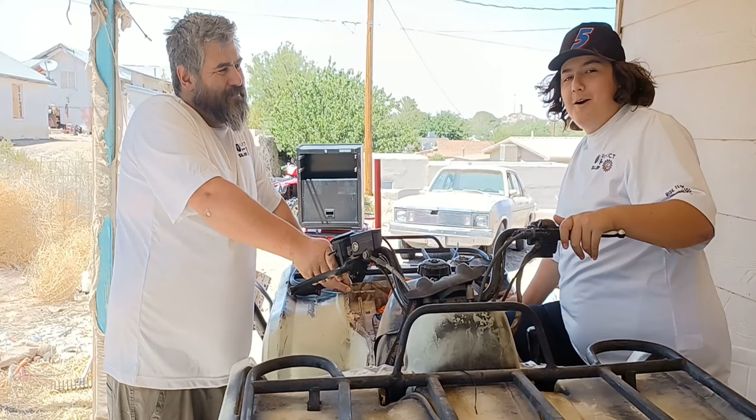Welcome to Project Sullivan. On this week's episode, we're going to pull the carburetor out of our Hisun ATV. Then we're going to rebuild it. Then we'll have that carburetor back in this ATV. I had some concerns to voice.

Gogo already had a new brake master cylinder installed, so we bled the brakes on our Hisun ATV. We had our lovely assistant, Nikki, help us pump the brakes so I could show Gogo how to bleed brakes. With an old piece of brake line and a water bottle, we made a brake fluid container. It worked very well, I think. Now that both front and back brakes are bled, this disc brake system can finally stop.

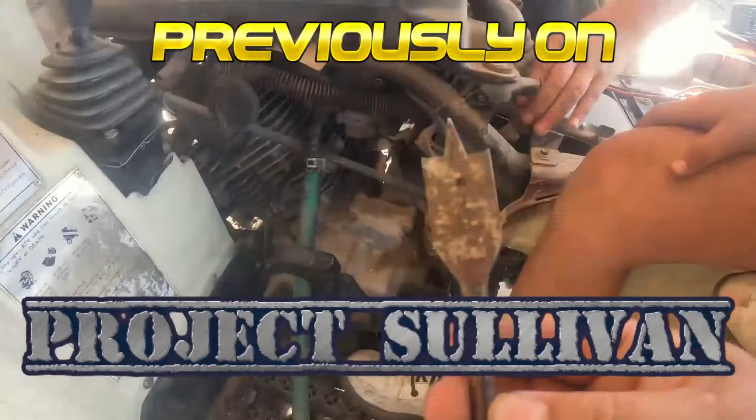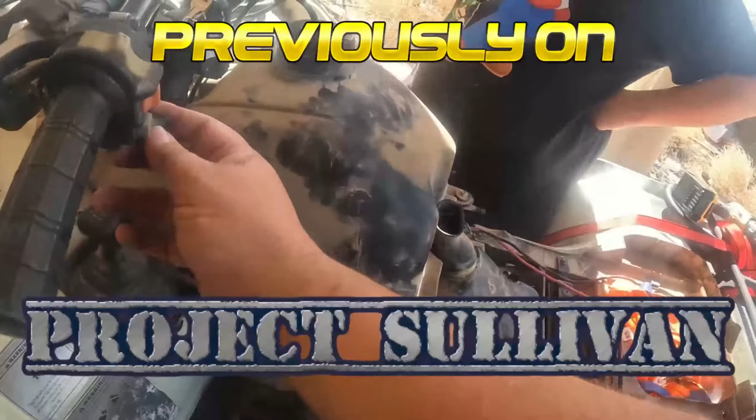Showed Nikki how to check the oil. We removed the upper panel to expose the fuel cell to get a better look under the hood, so to speak. We drained the old fuel in preparation to get it ready to run. We checked our air cleaner after putting some new fuel and starting it up with a little help from one and done. We've discovered we're going to need to do more to this ATV. That's why this week we're rebuilding the carburetor.

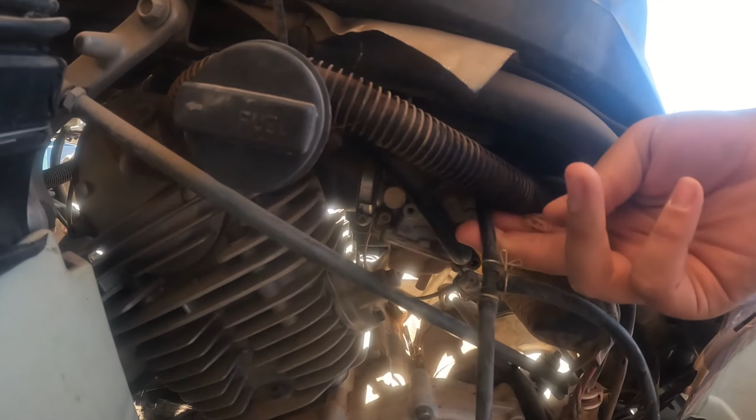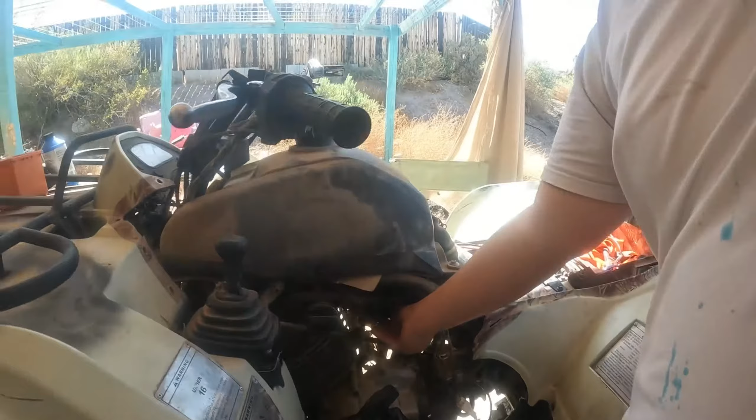So, where's the carburetor, Gogo? It's right there. Well, this hose is connected to the carburetor. Yeah, you can pull that one. That one just pulls off. Oh, that was easy. I don't know what that hose is. How about this hose? You should just disconnect it, yeah. Wait, isn't this one gas? Yes. But the valve's off, so it should be able to take off. Oh.

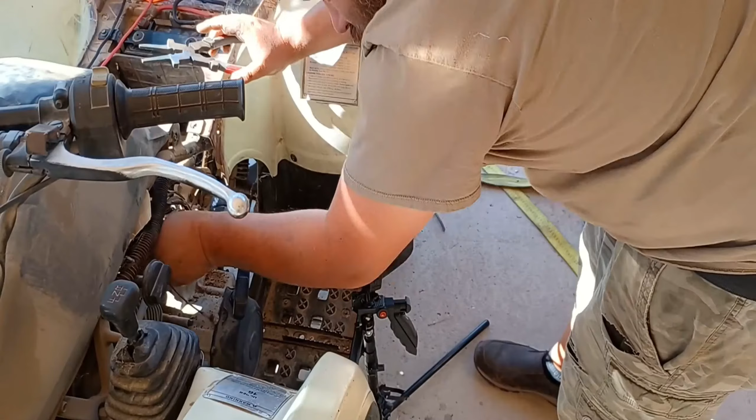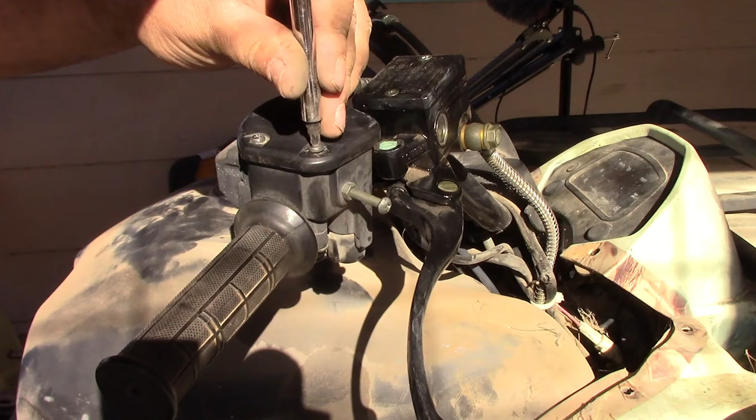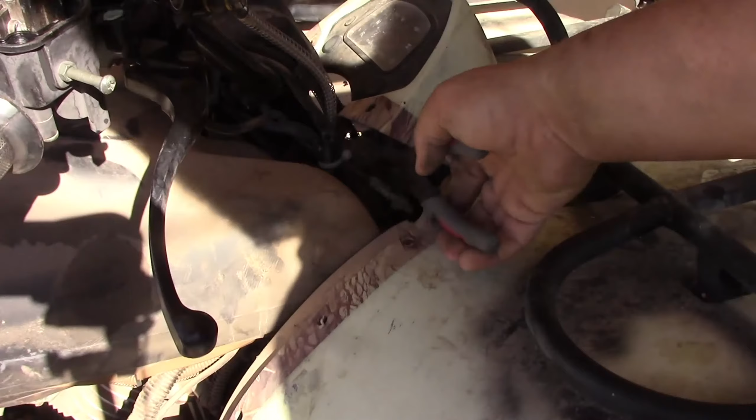This right here we clip. It's got that quick removal deluxe option. You know, plastic's already dry rotted and breaking. So, give this a little twisteroo, twisteroni, the San Francisco treat. And then cloud. Get that thrown around there. Now the carburetor's out, and there's the throttle cable. Success! Now we have to rebuild this one. Now it's time to go inside. We'll meet you guys inside.

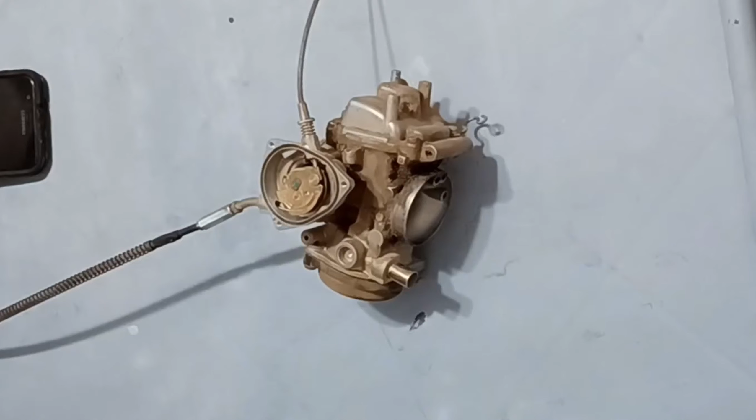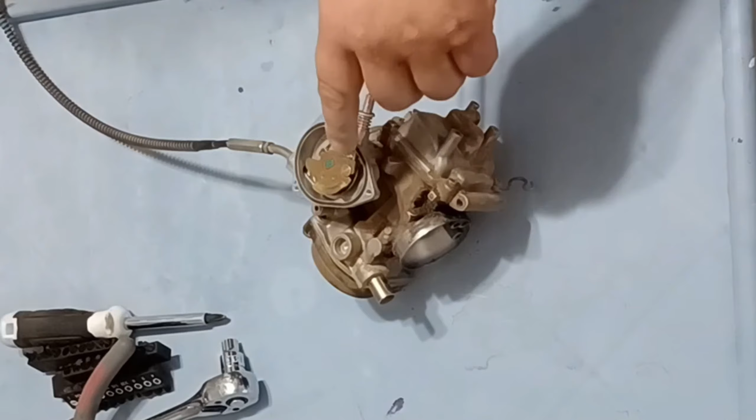So this is our throttle cable. Now how do we disconnect that? This is our remote idle. Is that our issue? See, you go like this and you spin it and it spins the idle screw. If you pull this cable, it either pushes this out to give it more idle, like more gas at idle, or it pushes it in to where it'll be less fuel at idle. Is that our issue? No, because it used to idle. So we need to clean it out first.

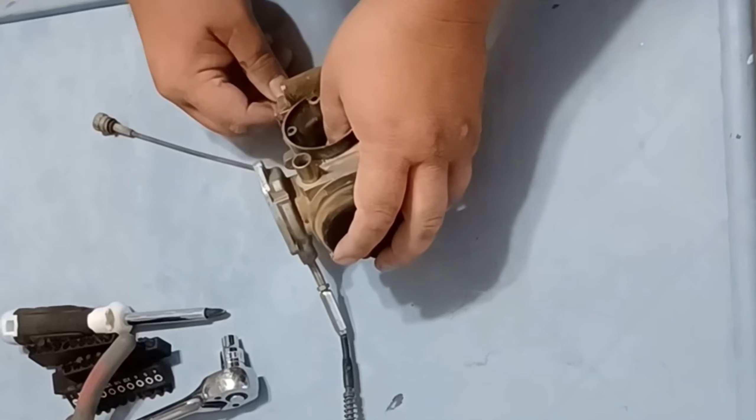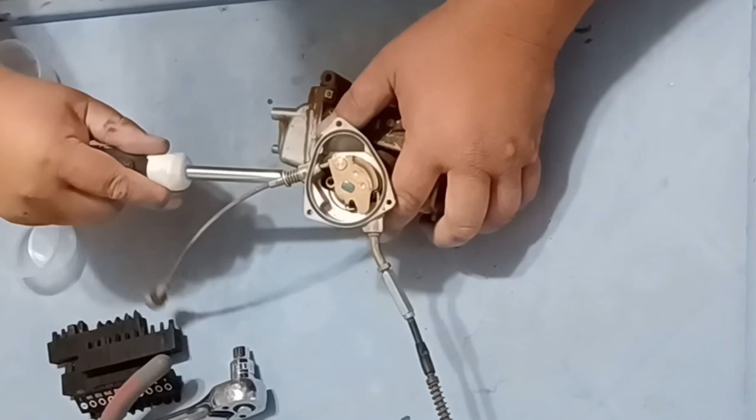This is our bowl. This is probably where our problems are going to be. So that's what we need to take off first. Let's get a dish for all the... Alright. It's nice to actually be under the AC for this. Oh yeah. Break that loose. So far so good. Alright, let's take some extra video here. Of course, I'm the hardest one. There you go. We'll go ahead and take that off.

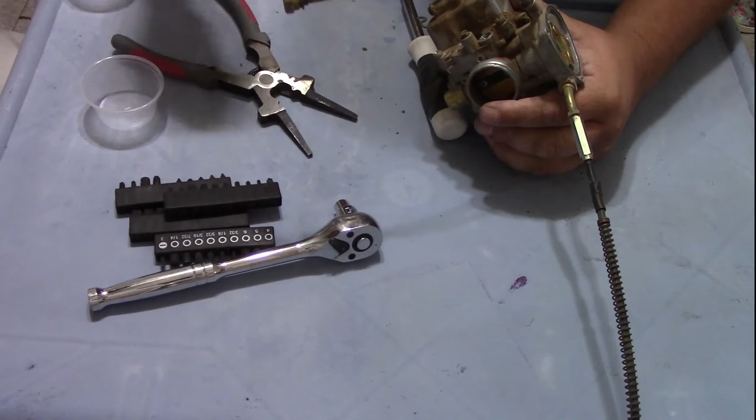Mostly we're working on our carport for this sort of thing. It is really nice to be underneath the AC for once. Right. I don't know if it's too loud. We might have to do voiceovers here to compensate for it. Hopefully not.

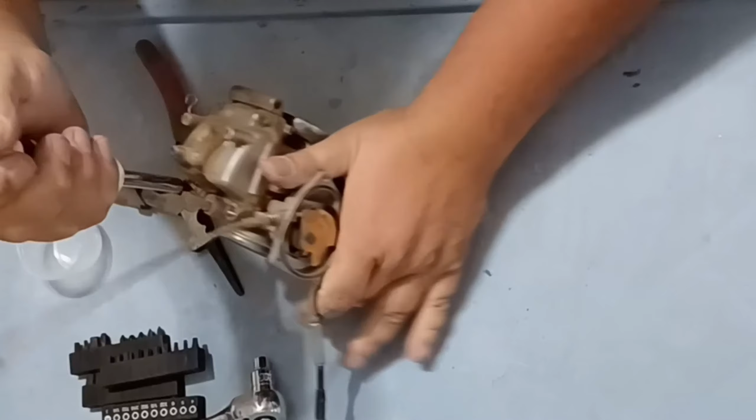Okay, hold the carburetor, go two hands. I'll do my best. See if I can teamwork it. That might hold us back. Go and take this screw off. Drill? Well, when we take the other screws off, maybe it'll loosen up. This is my first time personally taking apart a carburetor.

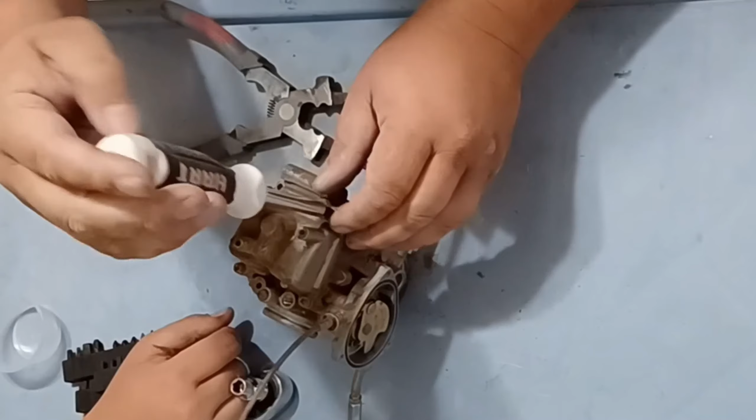I'm not a carburetor guy. I've only taken a couple of these little carburetors apart. How many car carburetors have you taken apart? Oh, quite a few. I've owned a lot of crappy cars. So do I now. I own one crappy car. That's not very crap, okay?

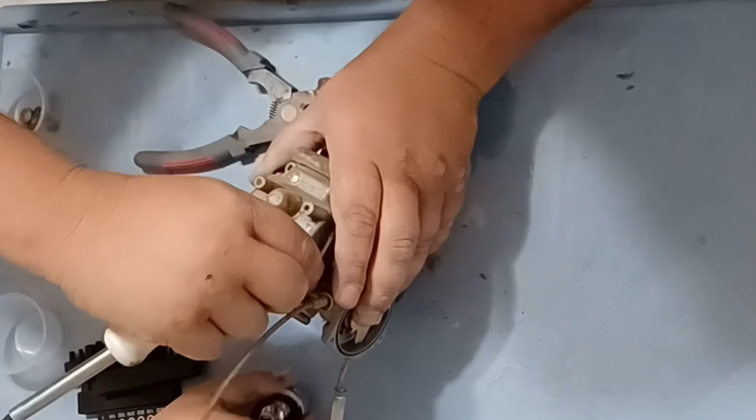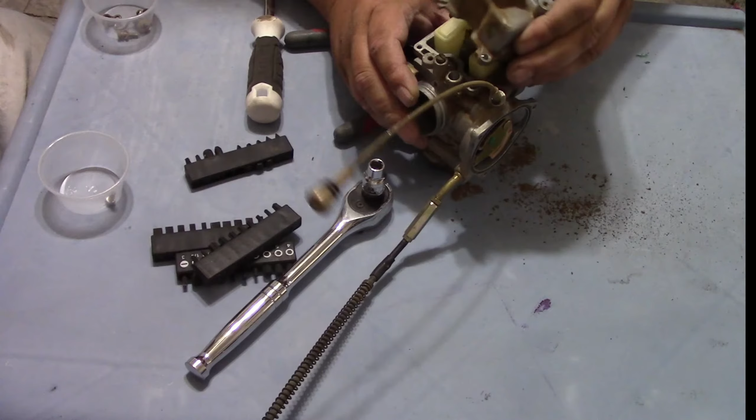Do you need a bigger one? To replace that screw? Oh, look at all that gunk that just shot out. Yeah, we don't want to put that screw back in. We probably won't. Put this in our discard pile. Okay, so here's our bowl. This is our gasket. We don't want to tear that because I plan on reusing it. We don't have a rebuild kit, which is crap, so we'll see how that works.

This is our float. This is what turns on and off the fuel. So the fuel comes in here, right? And then when this float is up, it shuts off the gas. These float on the gas, so when they come down like this, it puts more gas in. But if we look inside here, that is amazingly clean. It should not be that clean. Do you think it would be the... I don't even know what I'm trying to say anymore. Well, you better get used to doing carburetors. We have like three more that we have to do.

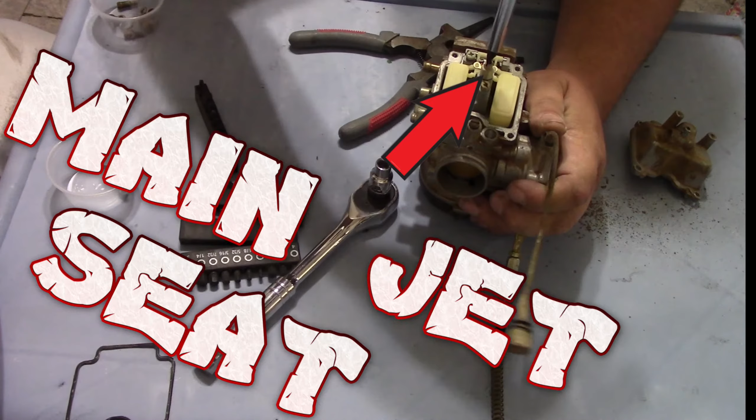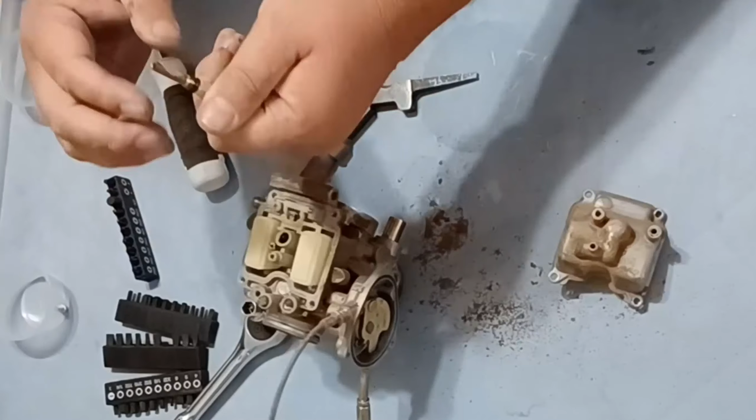So that's gonna go in there. Take a good look. You have to rewatch this video to figure out where the stuff goes. That's why we're recording from a couple angles. These are our jets, our metering jets. Well, that is so weird that it's that clean inside. I'm gonna try taking this jet out. I think that's our jet. Okay, it was only tightened to, which is not very much, so that's good. It wasn't like the other one. Nice and clean inside. Why is this carburetor not working? The needle's making noise.

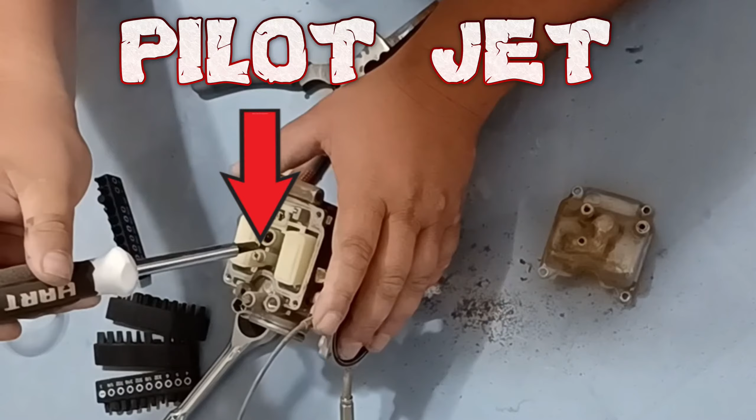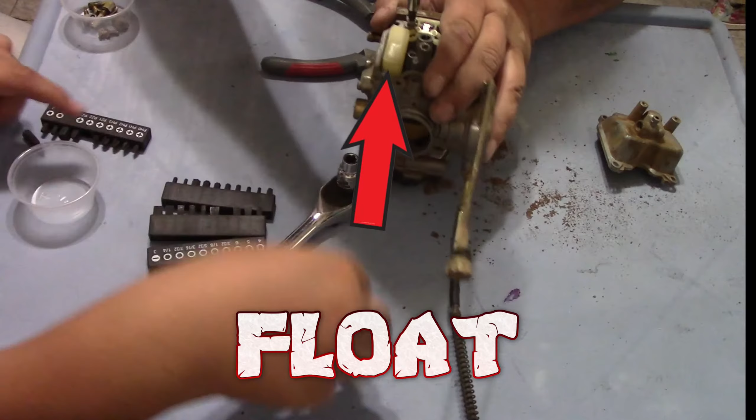Let's take this bad boy out. Okay, that's the one I took out of there. Here, instead of that, having a discard pile, there's that there. Again, reasonably tight. Let's take off our... Maybe we'll just do a half rebuild and not take out every little piece. Either way, we're going to soak it in vinegar overnight.

It might have been that hose. Remember that bad hose that we found was broken? Oh, yeah. The one with the air cleaner. Are we gonna rob it off the Nova? Because this is looking surprisingly clean.

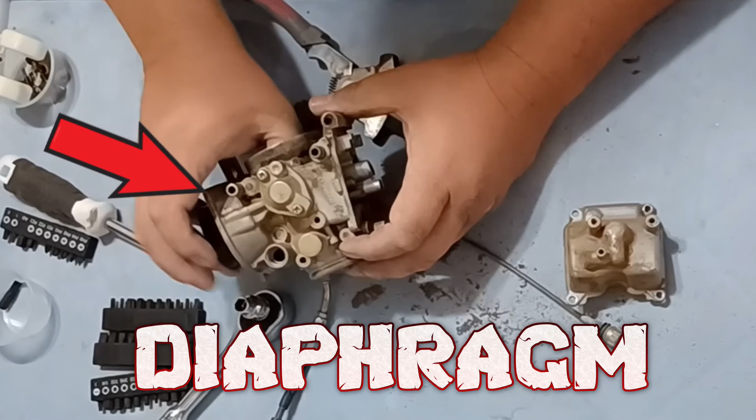Here's a Phillips head. Let me see. Oh, never mind. And that was spring loaded. That could have ended bad. I've had my experiences with springs for the day. I got it with that one. Maybe not. I need it. Okay, that's the... Okay, that's for the needle. Got it. That still doesn't look that bad. I've seen worse in videos.

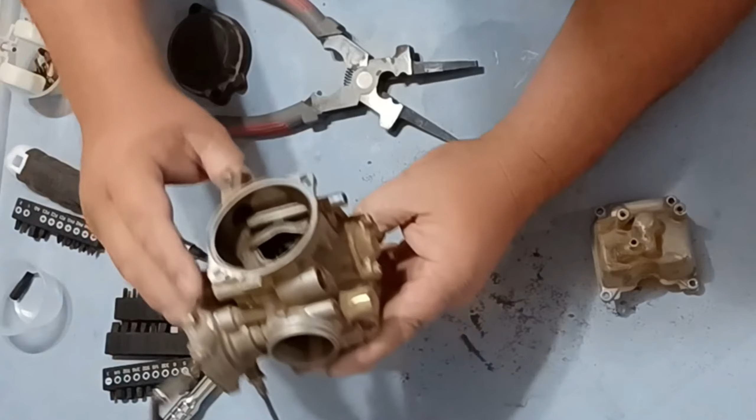I don't know, that needle actually looks like it's pretty dirty. Oh. That might have been what was dirty. And then like all this is pretty nasty in there, you can see. So, let's get this. Get the brake cleaner out. No, let's get this soaking in vinegar. Why are you so insistent on using vinegar? Vinegar.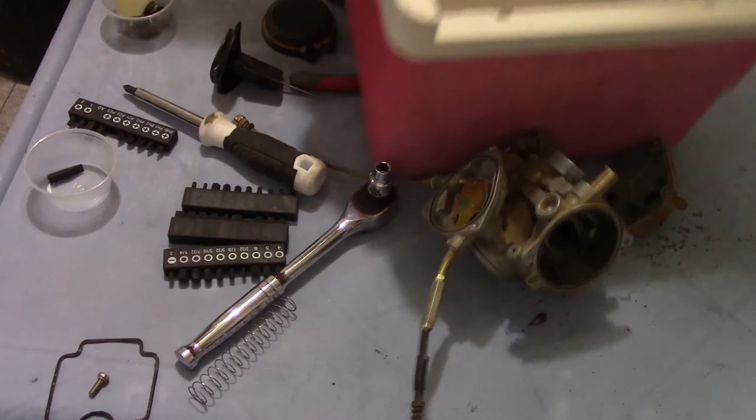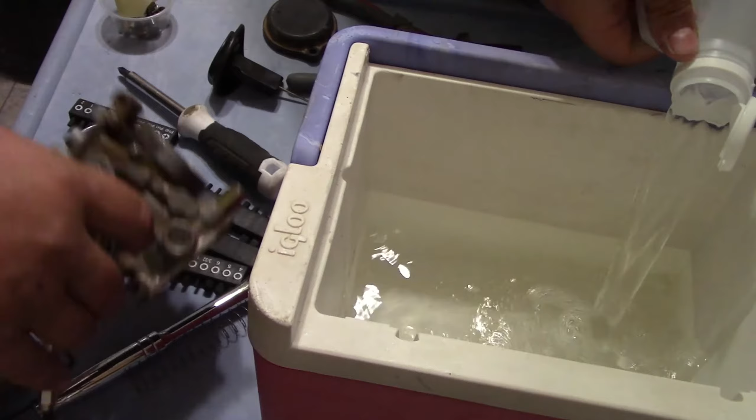Hey, guess what? It floats! Are you ready to get up? Dave, did you know how it floats? Well, I hope so. There's a float in it.

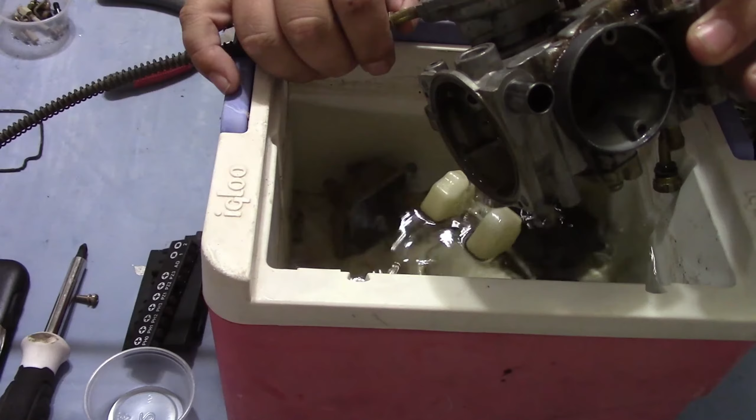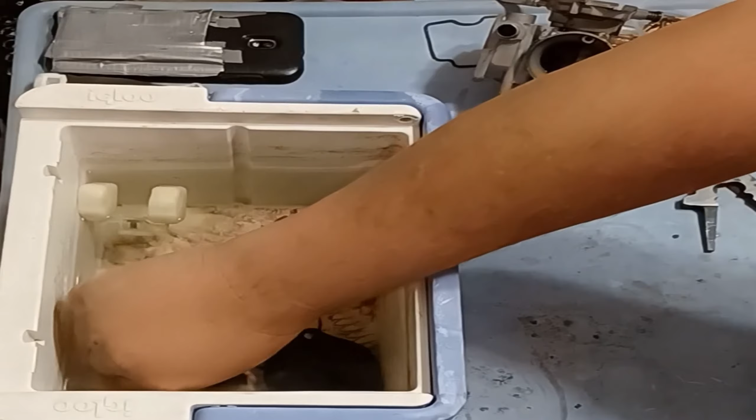Day 2. Drain it, best we can. Swear to God, if it still isn't idle, I'm just gonna be upset. Well, we'll see. We might need to adjust some things. I did notice that the needle was kind of stuck yesterday when I was taking it apart. And I thought that plate was gold yesterday. Might have been. Flashback to that right now. Now our whole house smells like vinegar.

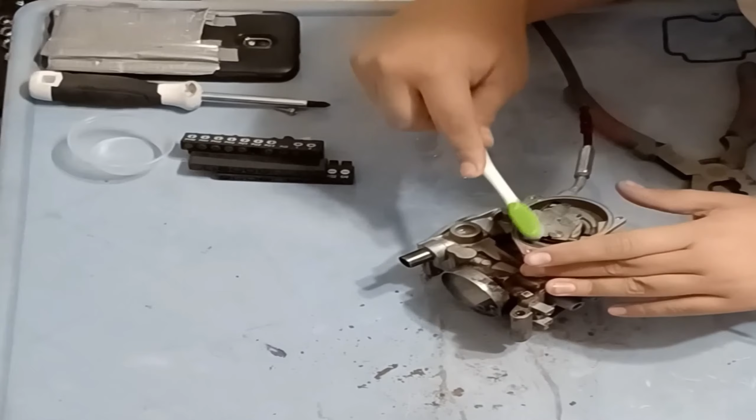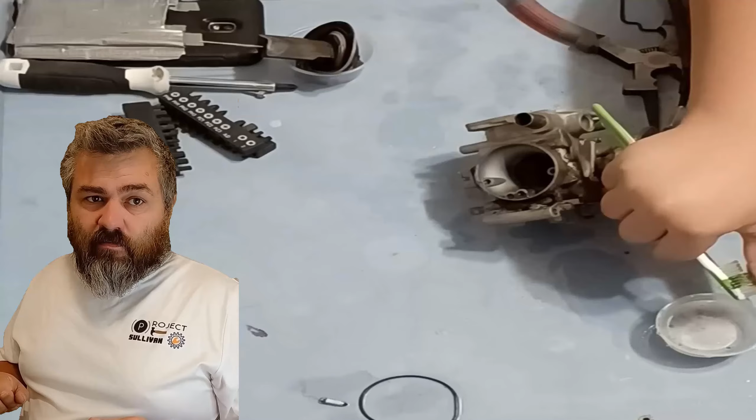Most motorcycles, ATVs, and UTVs sold today are fuel injected, which I prefer. It's like I always say, small engine, carbureted, broke down, probably the carburetor. Normally I try to avoid buying anything small engine wise that's carbureted. ATV, UTV, motorcycle, but here's the thing, I already own one, and there's plenty of them out on the road. Even if you're buying them to restore them or repair them and flip them,

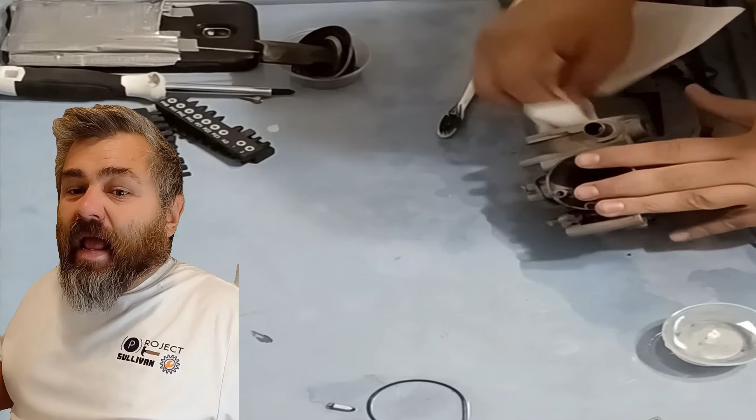you can. Since we're rebuilding one, here's Project Sullivan's Know Nothing Guide to CV carburetors. Some things about carburetors are present and have to be present in every single version of a carburetor. Before we get started, I want everyone to know I'm not a carburetor guy. I just know enough to fake it. And I can kind of teach you how to fake it. Let's see how it goes.

The concept behind carbs is simple. See, that could be cool. Let's say carbs.

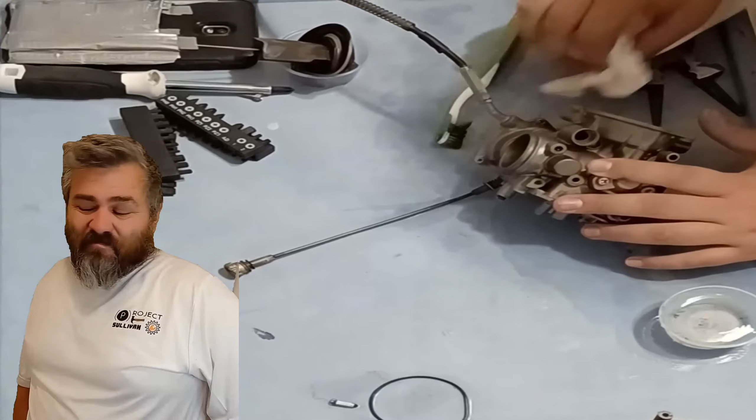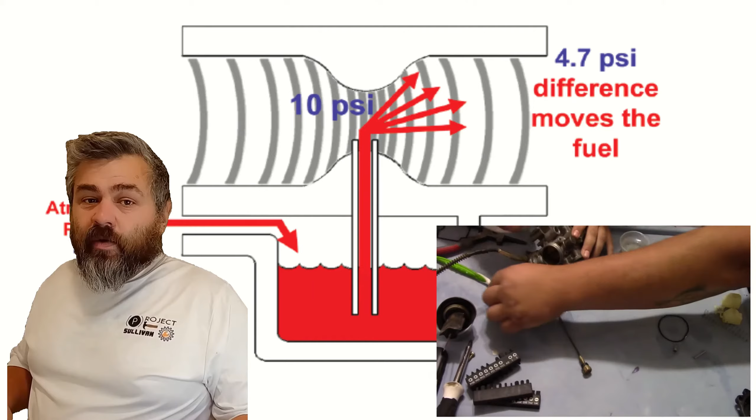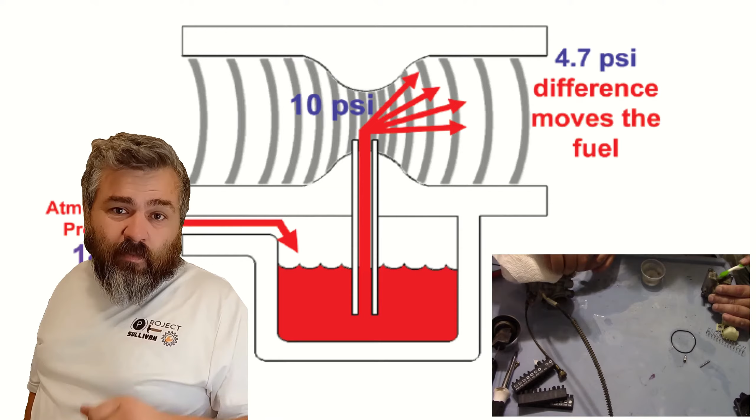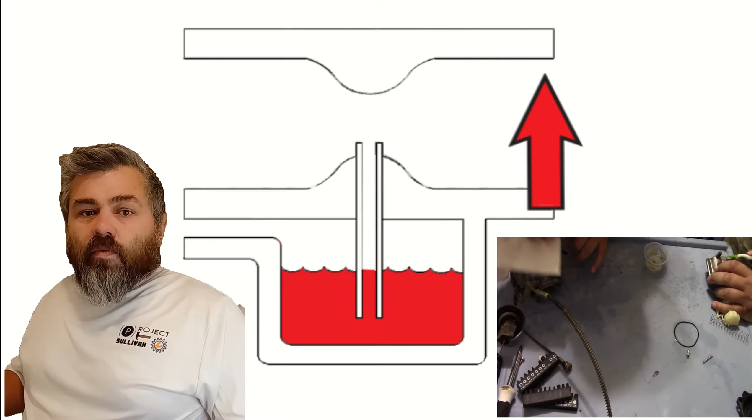Like I said, carburetors, the concept of carburetors is simple. All they're really doing is creating an atmosphere where you can make an air-fuel mixture that an engine can run off, trying to get as close to 14.7 to 1 as possible to be most efficient. First thing you need to know about a carb is the Venturi. And the Venturi has to be present on the carburetor for it to even work. The carburetor we're building today only has one Venturi.

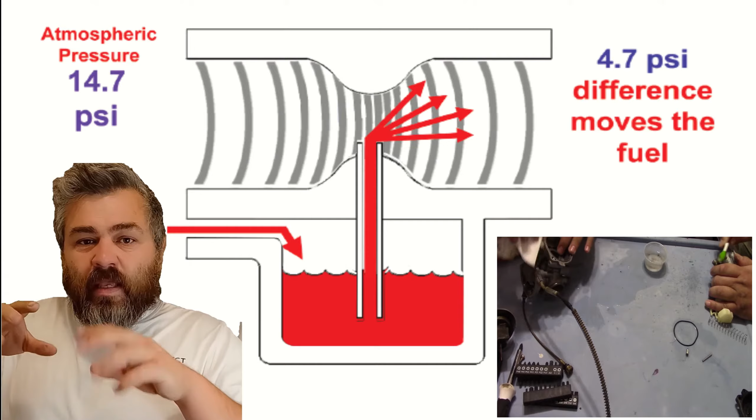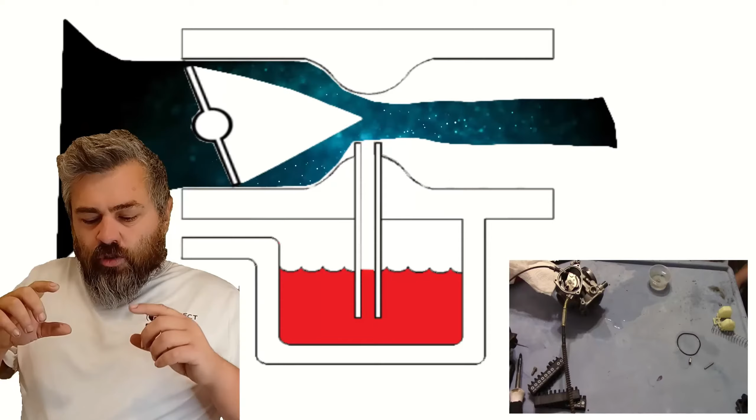The textbook definition would say the air's speed increases while the pressure decreases. This drop in air pressure pulls that fuel out of the jets, which goes into the Venturi, mixes with the air, and goes into the cylinder head. All this basically means is that when you hit the throttle on the handlebars, it pulls the throttle cable, and the throttle cable just opens the butterfly, as seen in the picture here, and it's actually the vacuum that controls how much the slide is moving in and out. On a mechanical one, it's all controlled mechanically instead of through vacuum.

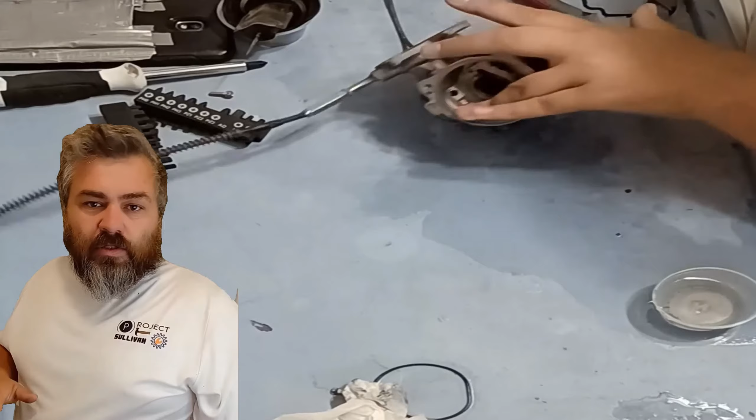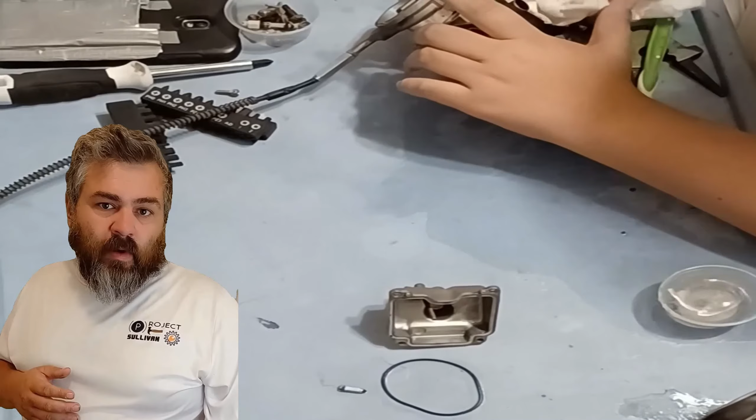CV carbs have their application. They're better in multiple altitudes. They have a smoother throttle response. The mechanical ones always have to be adjusted according to altitude, but they're your performance ones. They're your racing carburetors. They're all or nothing. They're just ready to go.

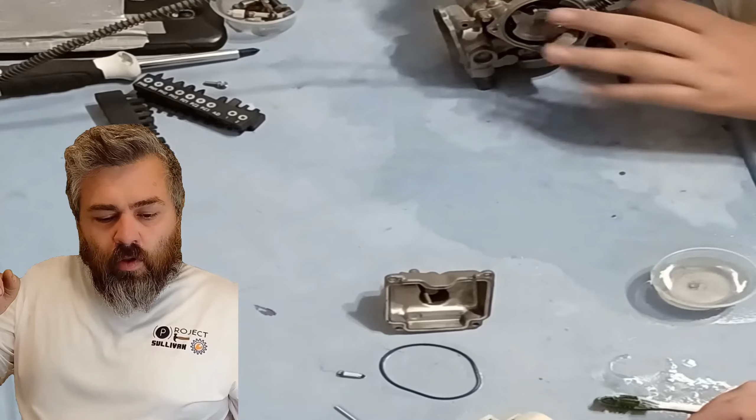The first piece of the carb I have already covered, which was the fuel bowl, and I talked about how the fuel gets into the plunger and the float. But the second part I want to talk about is the accelerator pump. The accelerator pump on this carb activates by vacuum as well. And basically what it does is when you hit that throttle, the vacuum sends a signal to the carburetor and there's a burst of fuel that gets thrown into the venturi,

and it gives you that get up and go. You know what I mean? A little bit of get up and go. So you hit the throttle, whum, whum, whum. It gives them a little extra fuel, which when it's wide open, you can hit that thing and it does. Accelerator pumps kind of all work the same.

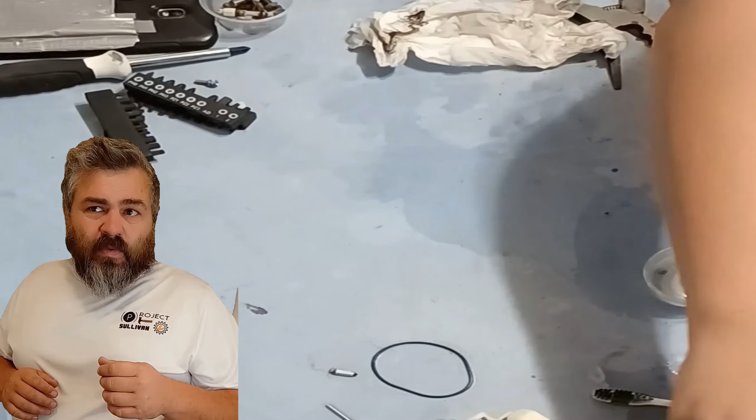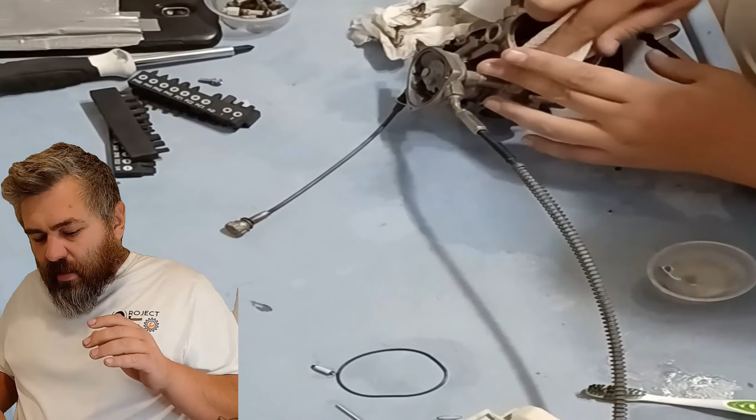That's just, ours is operated by vacuum. That's all you need to know. We're also not going to take this one out of its housing because we didn't have an indicator that it's broken. Your idle air fuel mixture is 14.7 to 1. That's what you're ideally looking for when you're adjusting a carb. Fuel injection just keeps it there constantly, or relatively constantly.

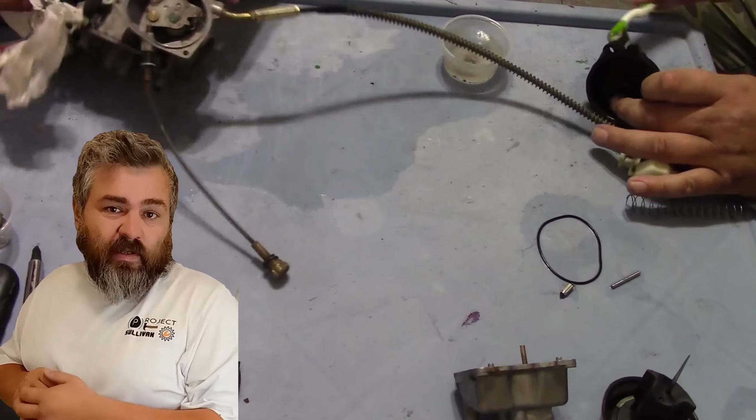And that's why fuel injection gives you more horsepower and better fuel mileage. But it also means more working parts that, when they need to be fixed, are more expensive and oftentimes harder to fix. To try and keep the air fuel mixture at around that 14.7 to 1, the carburetor uses 3 circuits. First off, we're going to talk about the main circuit.

Alright, the main circuit is your fun circuit. That's what happens when you're at 75% throttle to open throttle all the way. That's your fun zone. Your get up and go, your climb anything, your pull anything. A lot of times this one doesn't have a lot of problems, but if you are having problems at upper ranges, that's where we would look. But as far as we know, we don't have a problem with that. Right now, we have a problem with a different circuit.

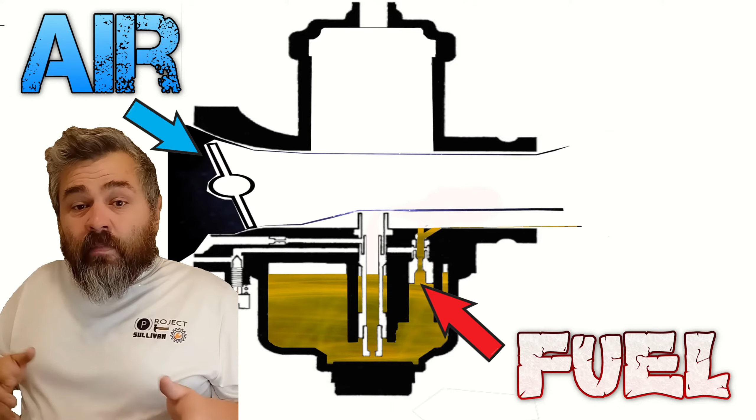The second circuit you're going to deal with is the medium circuit. The medium circuit takes care of everything from like 5% throttle to 75% open. If you have sluggish takeoff, you've got to look at the accelerator pump or even the mid-range positioning to figure out where it's going wrong. Mid-range, also not our problem right now, that we know of. The one we know is our problem right now is the third circuit, the idle circuit.

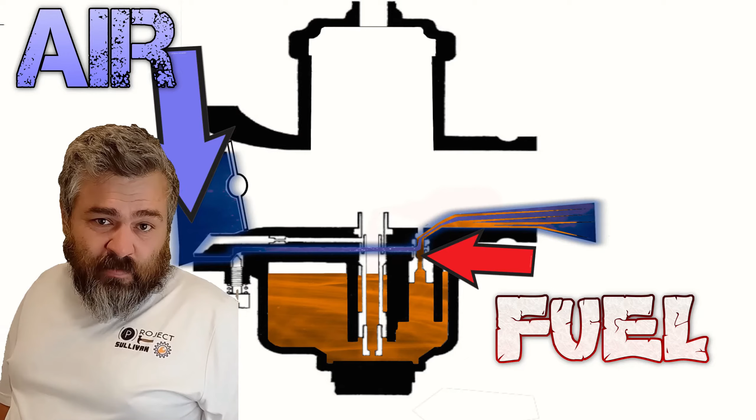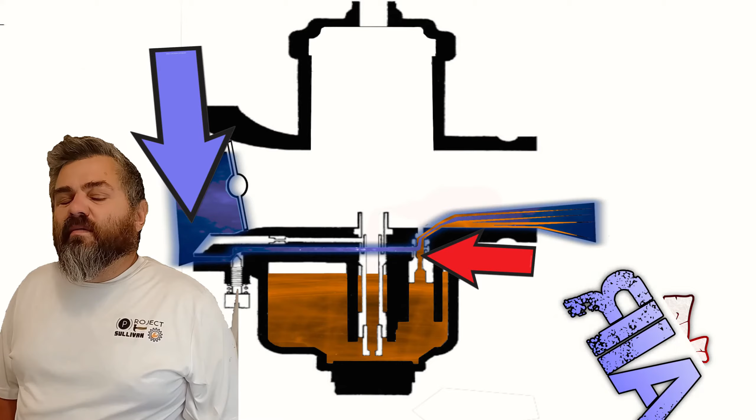Now when doing this, you should have a carburetor rebuild kit. You should not be trying to take one apart without one. I'm just seeing if I can get this thing going as cheap as possible before having to break down and pay for either a carburetor or a rebuild kit. We'll see. So what can we do to fix our carburetor?

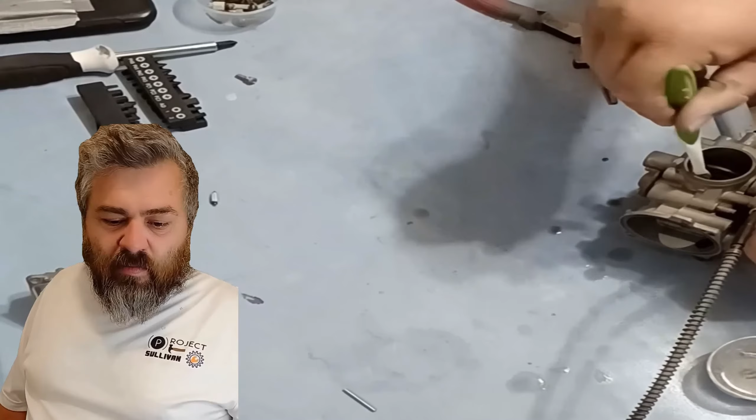Well, first thing, disassembly and cleaning. We've already done that. You're seeing it in the video here. Scrubbing it with our toothbrushes, using our vinegar bath. And the thing was surprisingly clean. That's another reason why we didn't take apart the accelerator pump. It was already surprisingly clean. Why would we cause problems with something that's already working?

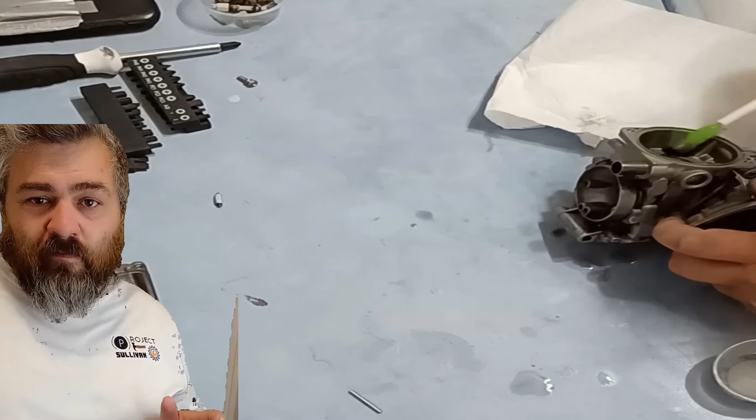Another thing you're going to want to do when you're fixing up for the season or fixing a carburetor is new fuel. If you've got old fuel, you want to drain that fuel. Even if it does kind of run off it, it's not going to run very well. Drain that old fuel, put in new fuel. Believe me, it's a lifesaver. It's going to gum up. So we've taken apart our carb, we've cleaned our carb, and we've swapped our fuel.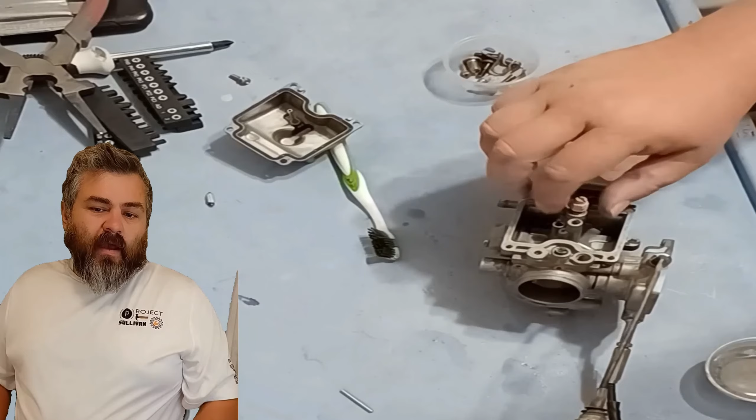Hopefully the last thing we have to do is install the carburetor. We'll probably have to play with the air fuel mixture screw on the carburetor, but we'll do that on the ATV. And hopefully I'll show you where that is.

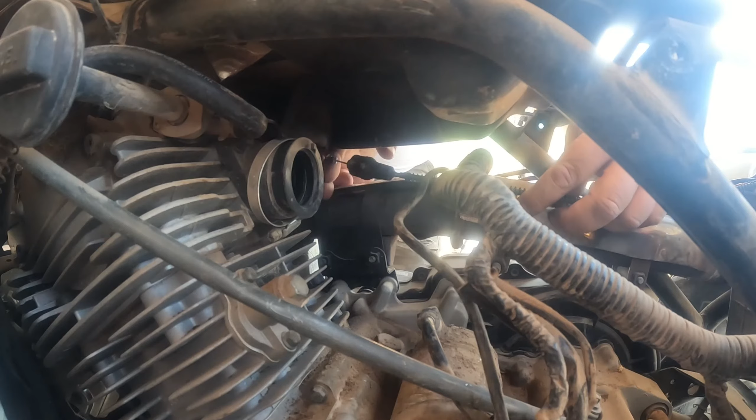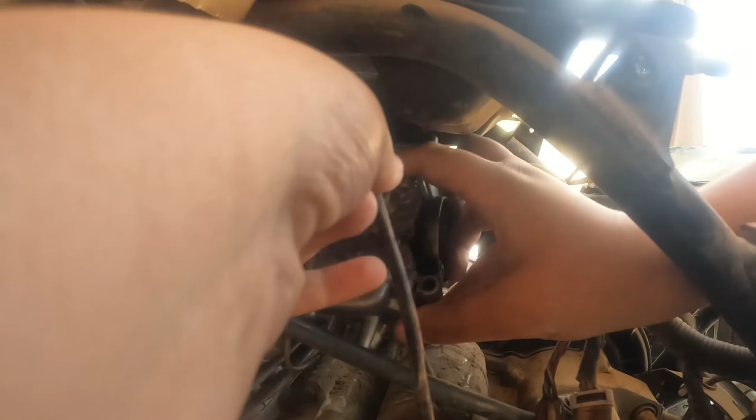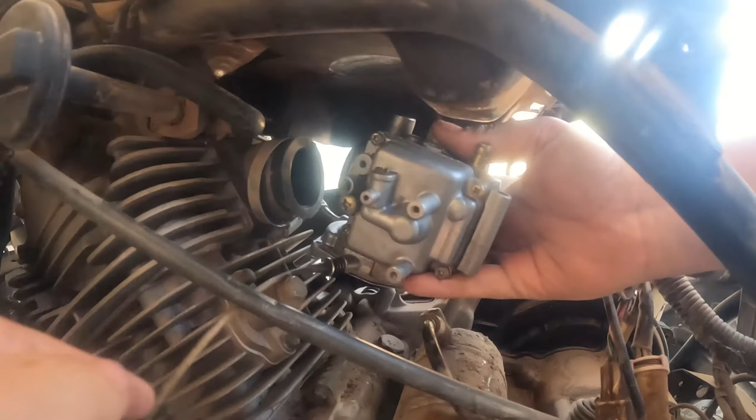Right now, we're putting the carburetor back on. Little disclaimer, we are missing a hose. But it'll be fine. Putting the carburetor in? Don't know if it's the right way. Hang on. Bring that over it. Logan, you got a hose right here. You gotta come over it. I thought you got it. I'm sorry. That's why I said bring that over. I have a feeling it's the wrong orientation. No. That's right.

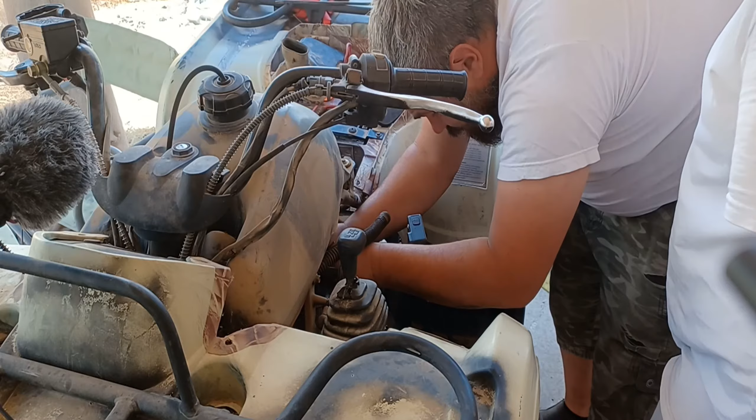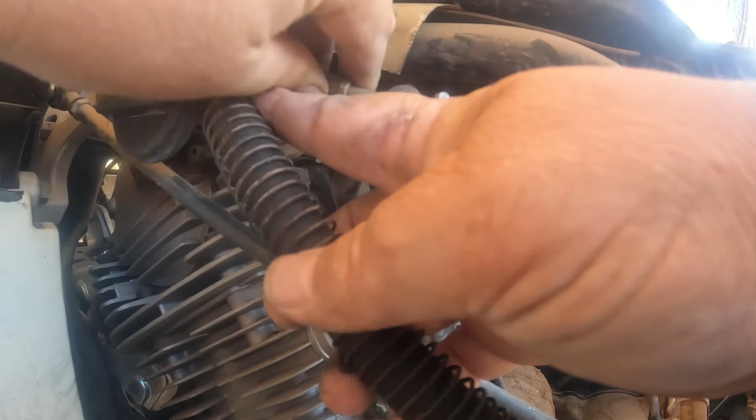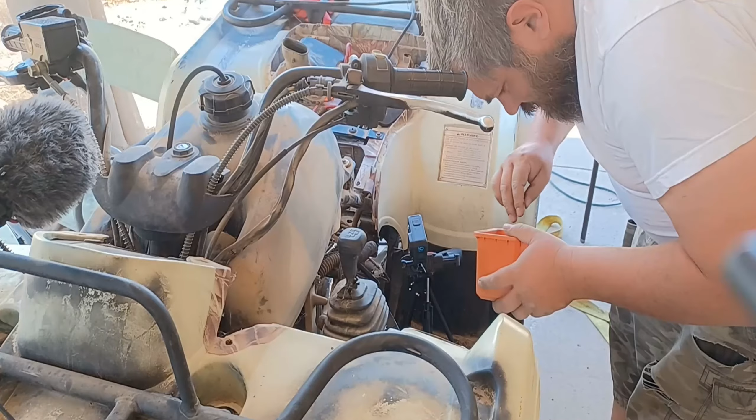Oh, I need that box of parts, Gogo. Which parts? Oh, this part. Yeah. I'm gonna put that spring there. I don't know where it came from because it shot out randomly. That looks like it's right though. That makes some kind of sense. On a scale of the make sense meter, it's about a make sense. The rest of it. It's kind of hard to get in here and show you guys what's going on.

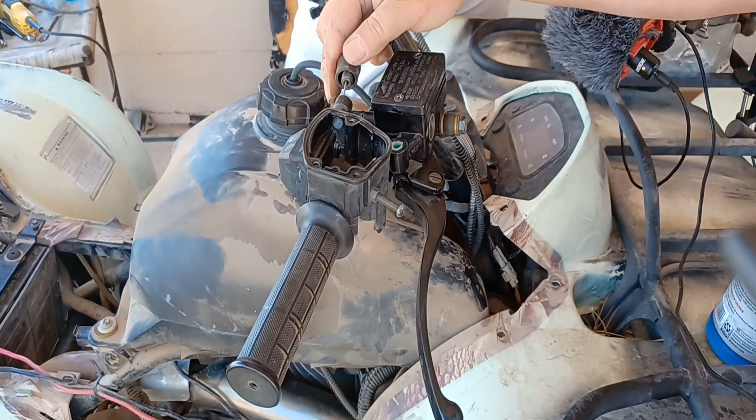I forgot how this goes on. It could very well have been over here, but I forgot how this goes on. Does it seem like it's tightening? Yeah. That fits tremendously better. Put that bad boy back on. Okay. Is it all working? Well, kind of. Can you hold this right here? Press it up. Stay there.

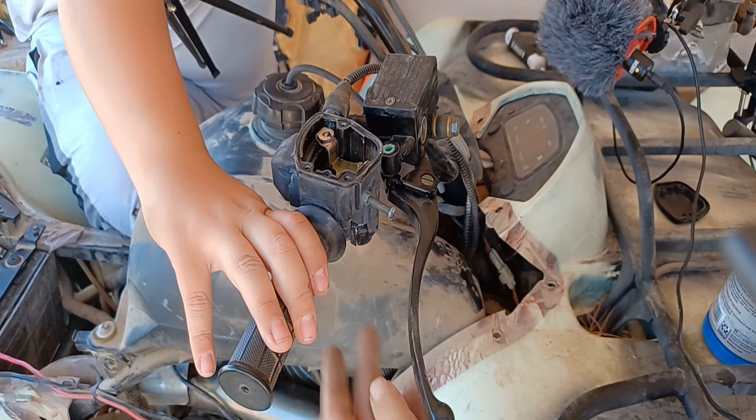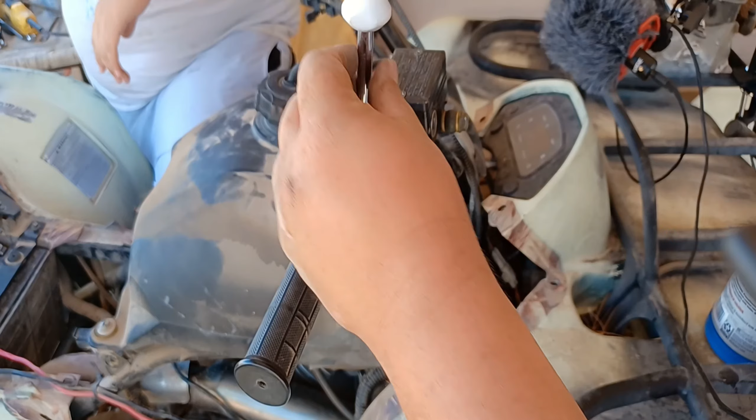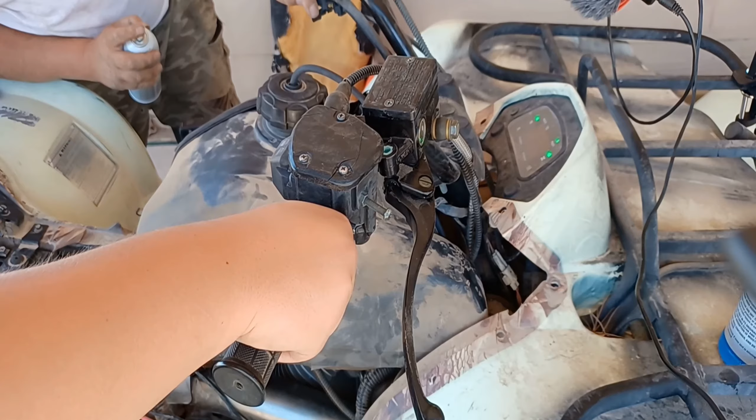And then instead of going to your toolbox, you want to grab whatever's around you that might kind of work and use it. Now hit it. Now the throttle's hooked up. You want to make sure your throttle cable housing isn't all cracked and broken. Still warms up. Give it a quick crank.

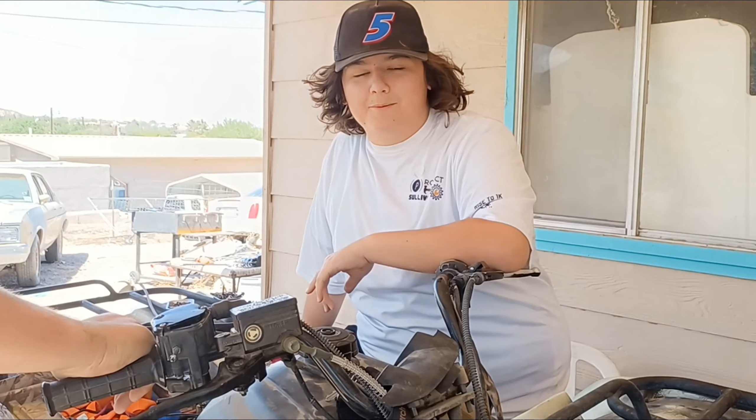Thank you for watching this week's episode of Project Sullivan. Next week we'll have this thing running, when we don't forget to charge the battery.